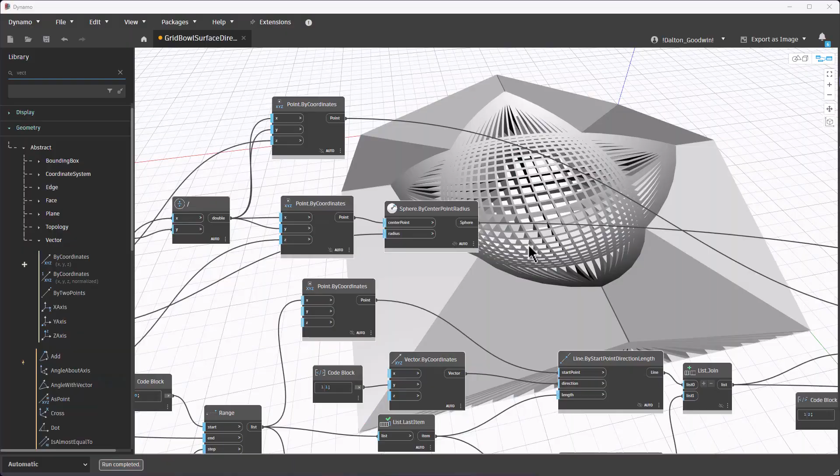Hey, so I've been working on some Dynamo stuff for 3D printing in between other projects. This has just been kind of a fun hobby.

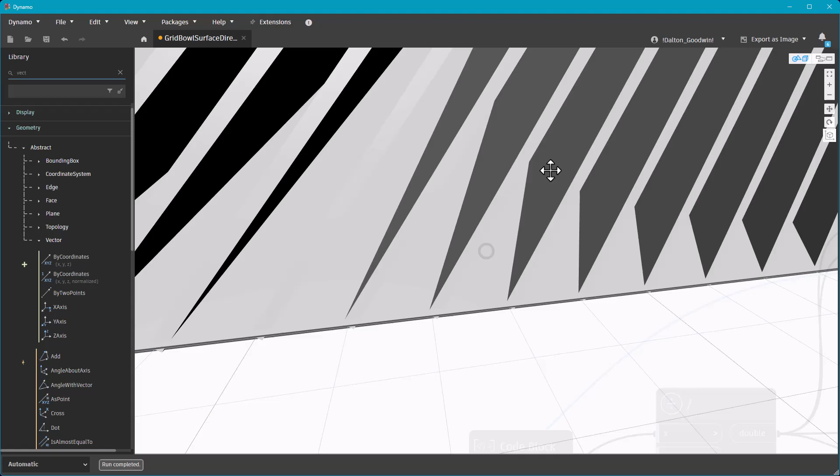I got into 3D printing a few months ago, and I was printing a lot of stuff from different websites, which I can share below in the comments if you're interested. I started to explore some of the stuff I was doing with Dynamo because I had previously created different things, different geometry inside of Dynamo, and since I have a 3D printer, I thought it would be cool to try to create those things.

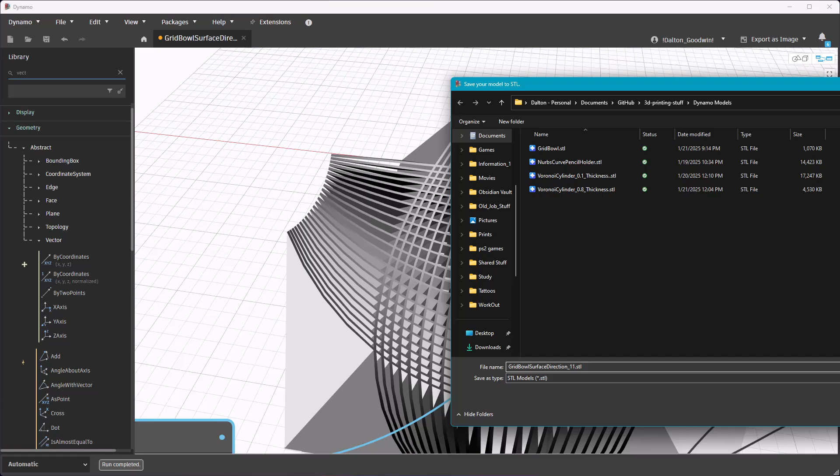So here is one example of a weird bowl type thing that I created. A lot of it's kind of basic stuff, and I'm building on it, mostly for fun and exploration.

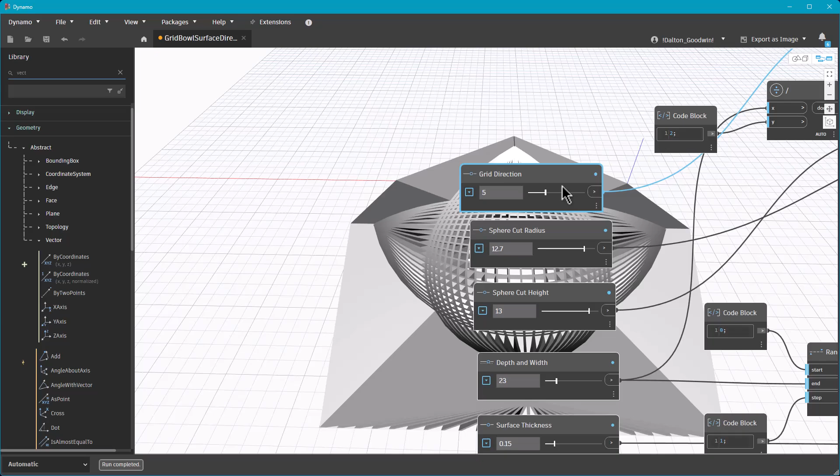I've got all of the files, the STL files, the Dynamo files, and images of the prints, all posted on GitHub so that you can download them if you want. What's cool about this is all the models are parametric, so you can play around with it, see what you like, and then export an STL and print that model.

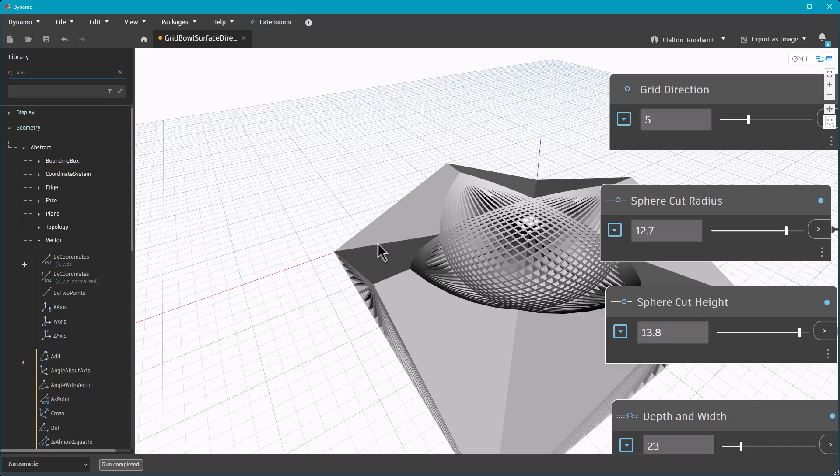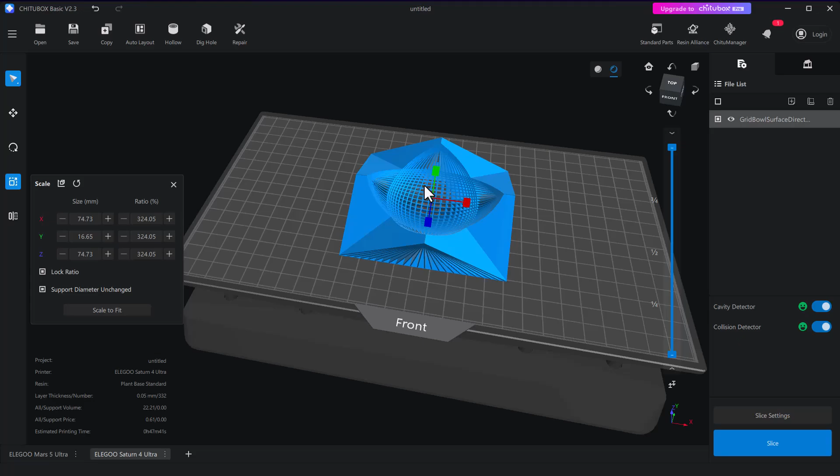So this is an example of me doing that essentially. The two different bowl things I made, I was able to bring into Chitubox, which is a software I use for 3D printing. It was one that kind of came with the 3D printer, but I do know there's a lot of other softwares out there as well.

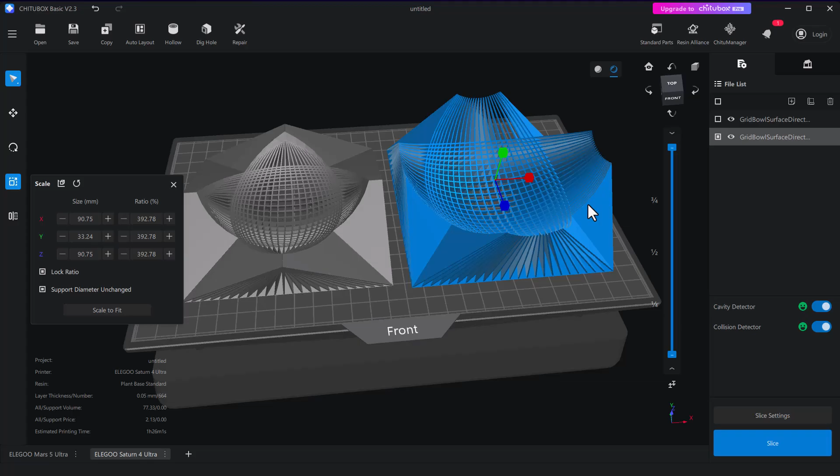It's free, or at least the version I use is free, and it does everything that I want it to do. I'm not doing a lot of crazy advanced stuff, so that may change in the future, or it may not fit your needs. I'm not sure.

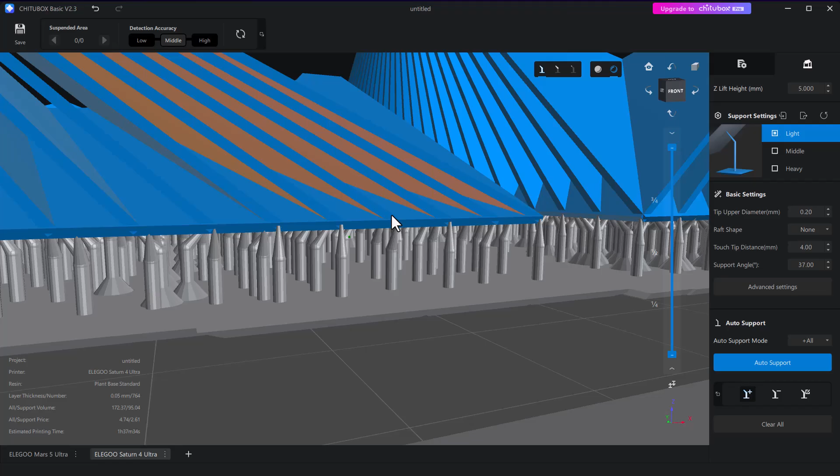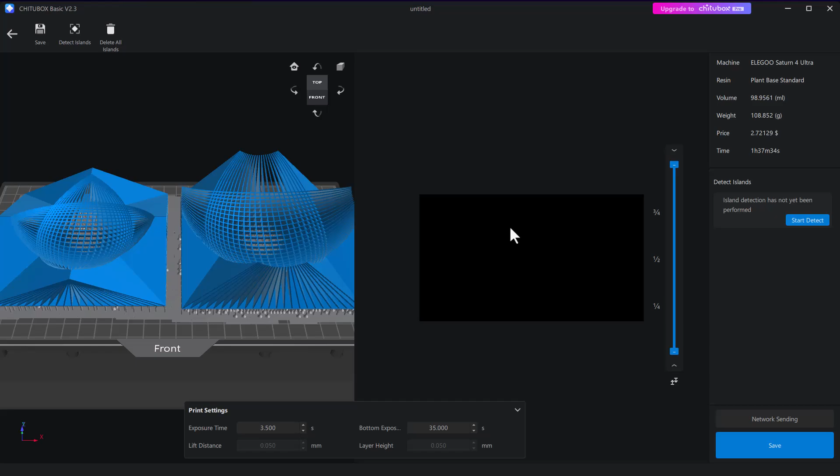But anyways, I threw both of them in there. They're STL files that were exported directly from Dynamo, and then I just brought them in there. I do add supports to everything that I create, because I did print something that was flat to the bed and thought it would print correctly. It didn't, and it broke a few things, so I've been kind of scared to print without supports. I may experiment with that later, but anyways, I'm able to bring it in pretty easily from Dynamo and then print it.

So everything that I've done so far, I think I've got 3 or 4 different models in the GitHub. By the way, the GitHub will be linked below if you want to check it out.

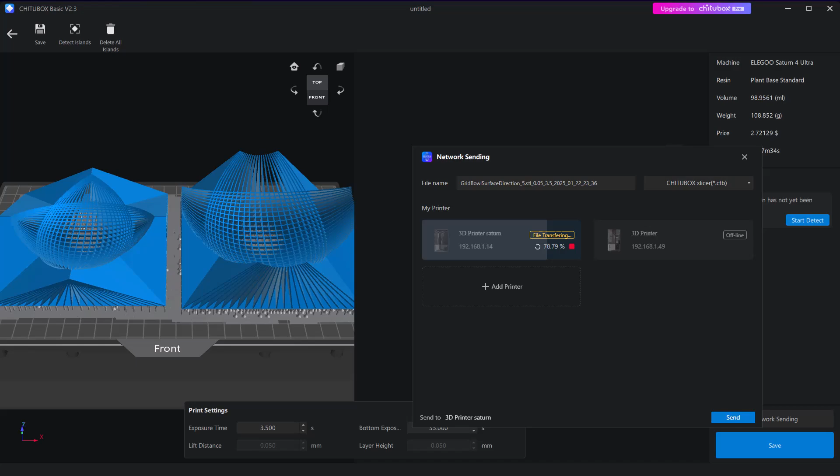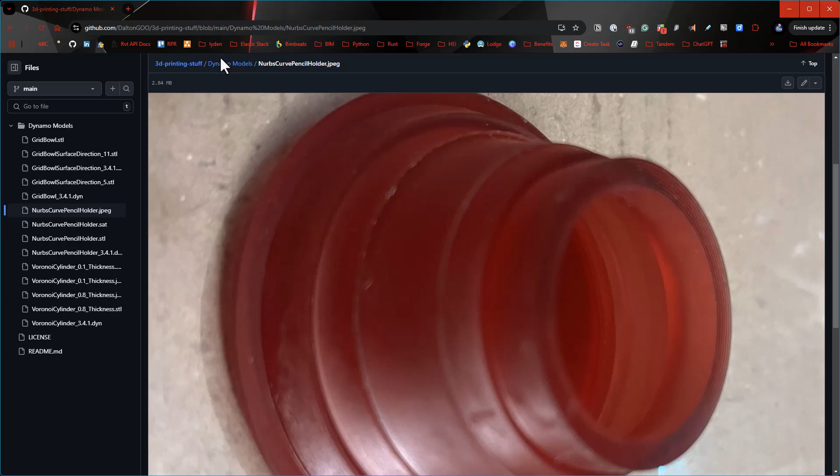So this is the GitHub, and you can see I've got all the different files up there. I may change the organization. One thing I do try to do is put the Dynamo version, the DYN file, so that if you do run into any issues, it's a way to troubleshoot it.